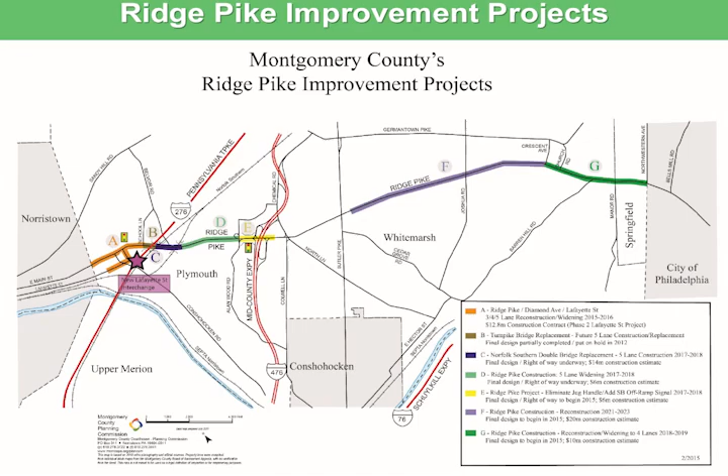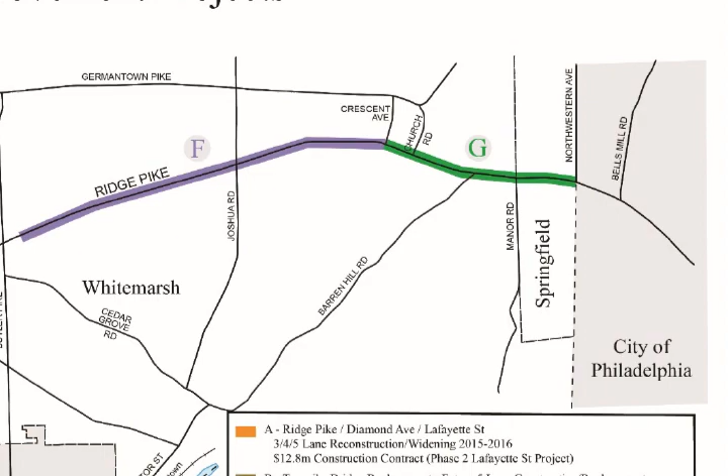Paul's with Gannett Fleming, our engineering project manager, and he'll go through and give everything. We own the entirety of Ridge Pike, and we have different projects in different places, but I'm not going to go into what all those other colors are. The only thing you need to focus on in this map is letter G. That's Crescent to Philadelphia. That's the subject of this effort right here, which uses 100% county funds.

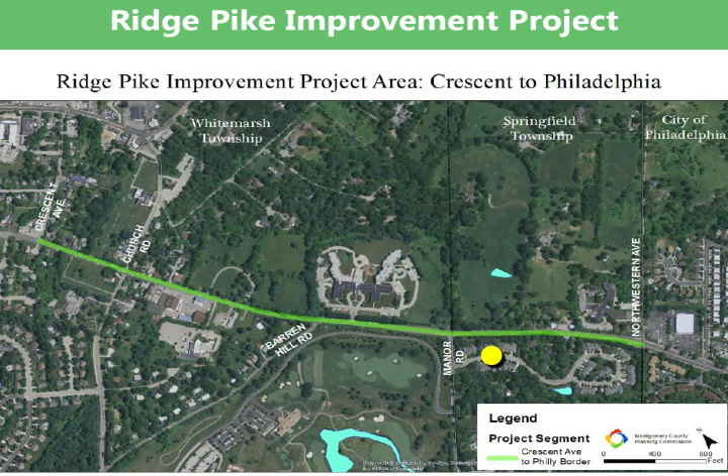Section G, as Matt said, is what you see in green. It's from Crescent Avenue to Northwestern. I'll give you some landmarks: here is St. Peter's Church, cemeteries on both sides, Hollids Hardware, its gift shop, Masonic Village, Barren Hill Road, Manor Road, the Eagle View Townhomes, and Northwestern Avenue, the city line.

So what are our project goals? First and foremost would be to reduce congestion. As you know, in front of Hollids, the 2 lanes eastbound converge or merge down into 1 lane all the way to the city line eastbound. Another important goal is safety improvements. Probably the most significant safety improvement would be to introduce signals where they're warranted. There are 2 traffic signals that are warranted that aren't there today: one's at Crescent Avenue and the other one is at Barren Hill Road.

Another project goal would be to reconstruct the pavement. As Matt had said, it's quite old and falling apart. It's been overlaid just about 5 years ago and is already starting to show signs of distress. Another important goal would be to accommodate pedestrians and provide for transit users, with sidewalks and bus stops. There's very little drainage, only 1 or 2 inlets on the entire stretch of Ridge Pike, and very little curbing, so rainwater just runs off right onto lawns and creates some erosion and flooding issues. And lastly, we would like to provide some aesthetic treatments to preserve the historic look and character of this area.

This is the first roll plot you may have seen when you walked in. It details some of the existing conditions, some of the problems with Ridge Pike. I'll take you through this in thirds because it's kind of hard to see.

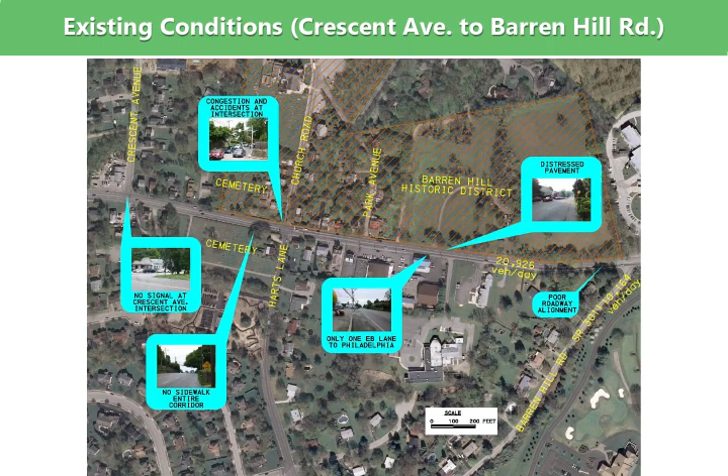The next third of the section would be at Barren Hill, between Barren Hill and Manor Road. We do have significant volumes of traffic. You may have noticed on the roll plot that there's about 31,000 vehicles average daily traffic between Barren Hill Road and the city line. To the west of Barren Hill Road, it's 21,000 vehicles, and Barren Hill itself actually has an average daily traffic of 10,000 vehicles. That's significant.

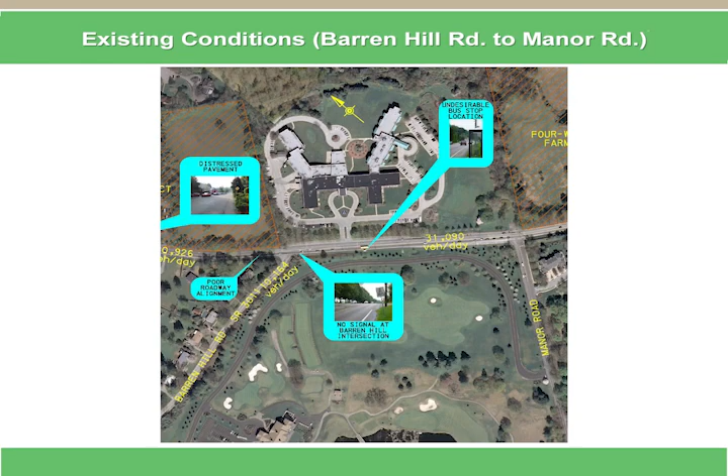Barren Hill Road does not have a traffic signal, and when we did our traffic counts, we easily found that it meets 1 or 2 warrants, so that qualifies to become a traffic signal.

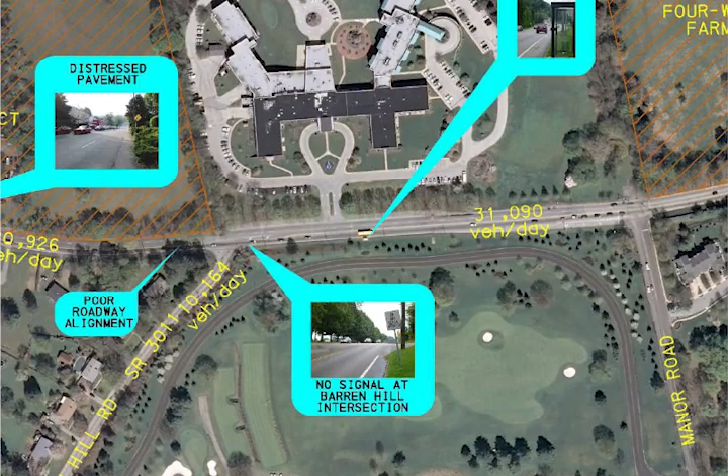There are issues with bus stops. There's a bus stop across the street from the old entrance to Masonic Village, and there's no way to get to that bus stop. There are no sidewalks. Some people actually cross 3 lanes of traffic to get to that bus stop, some of them elderly. We'd like to correct that condition.

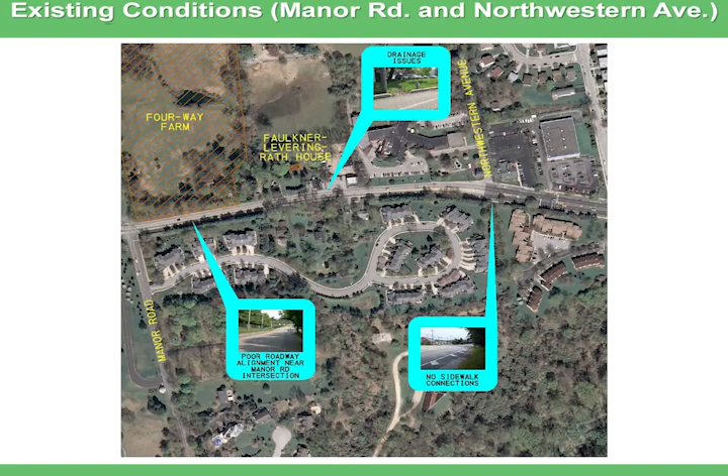East of Manor Road, another wiggle in the alignment when they introduced left turn lanes at Manor Road, and it happens again in a sag curve condition. Not as much of a problem as the crest curve or a hill, but still not a good alignment to have people move to the right, move to the left, and then right into a curve. We'd like to straighten that out as part of the reconstruction.

I mentioned drainage issues. This is one location where there's actually just a break in the curb and rainwater just rushes out of the curb and right onto a lawn and into a parking lot. And again, there are no sidewalks for the entire length of the corridor.

So I'm going to revisit the project goals and show you why they are our goals. Widening - why would we want widening? It's not so much widening, it's actually adding the missing lane east of Hollids.

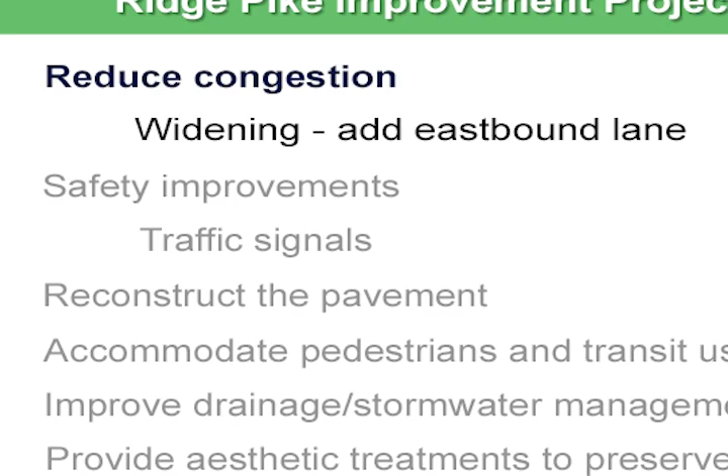Here's a typical situation on either a bad day or when there's traffic on Schuylkill, or just if it's rainy - it slows traffic down, but it typically backs up quite a ways west of Church Road. Here we are, even west of Crescent Avenue. That probably happens primarily because of the 2 lanes that merge to 1 out front of Hollids.

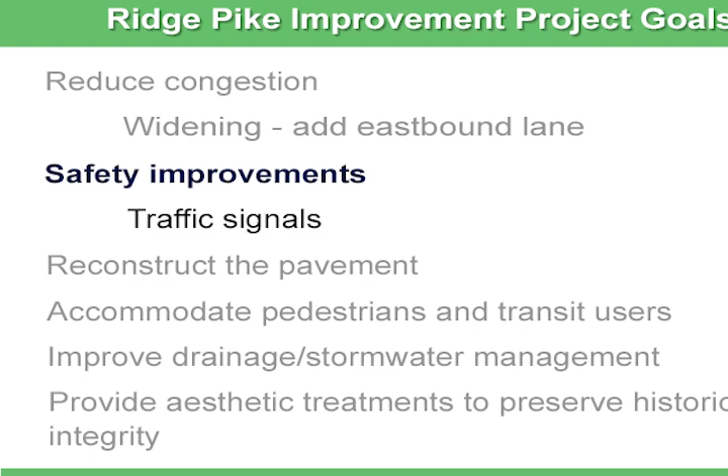Here's the traffic intersection at Barren Hill Road. Here's a truck trying to make a left-hand turn, just causing a backup on Barren Hill Road. And of course, we have plenty of signs that say don't block the intersection. Difficult to do in the afternoon when everybody is fighting for a position,

Or waiting for your courtesy gap to get into Ridge Pike. Another goal is to reconstruct the pavement. As we mentioned, it was first built in the 30s, overlaid in the 1970s, widened in the 1970s, and overlaid as recently as 2011. But it's already showing signs of distress in various locations, potholes. And you can see here this joint. This is in front of the State Farm insurance near Harts Lane.

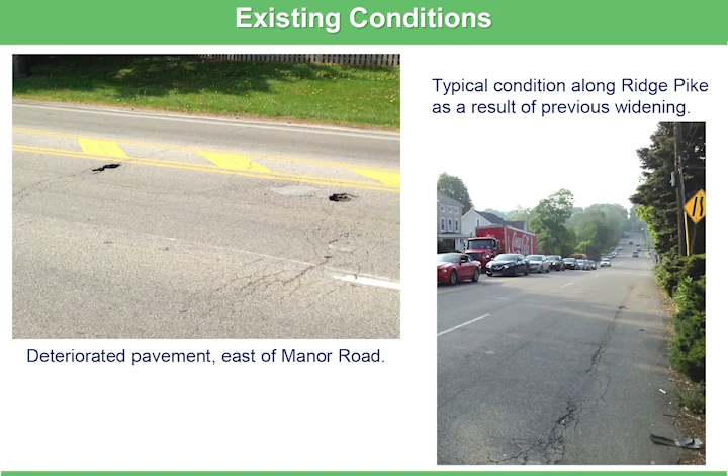I'm talking about where recently at the Manor Road intersection, a right turn lane was introduced for the new entrance into the Masonic Village. And you can, if you watch my mouse, I'll trace for you where the center dashed line used to be. Now it moves to the right. So you basically are shifting traffic to the right, and they have to straighten back, and then they go right into a curve to the right again.

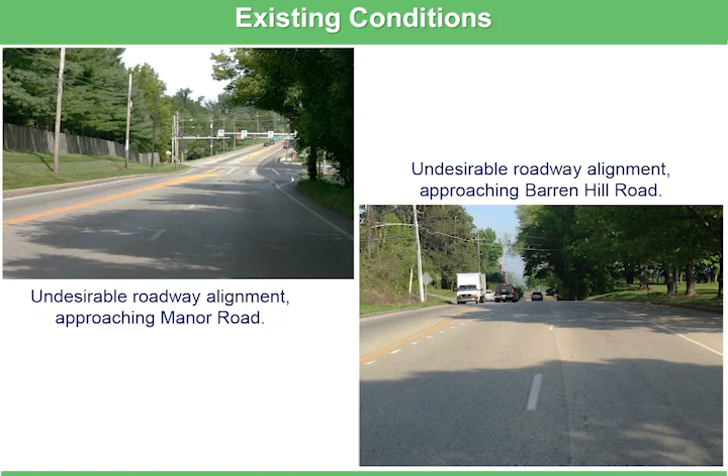You combine that with wet pavement, a little bit of snow, and you can't see the lines. People get lost, and you can have some accidents. So when we reconstruct, we'll straighten all this out and make it a smoother, straighter alignment. And then another one just like it is at Barren Hill Road, but that wiggle is in combination with going over a curve, where you can't see what's over the curve. Well, what's over the curve is another wiggle and another curve to the right.

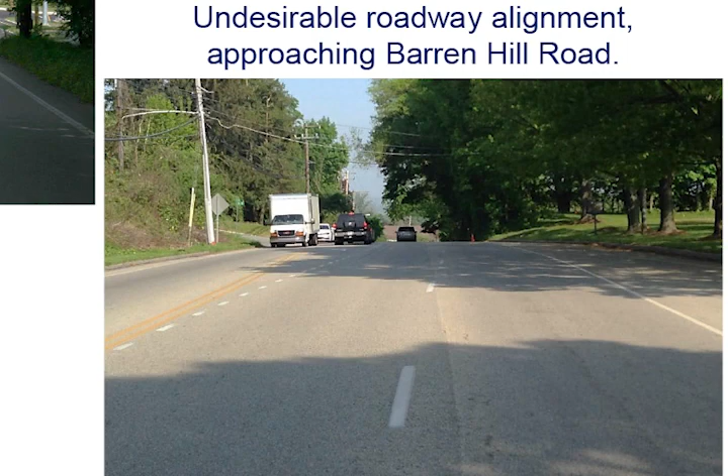Another goal, again, is to accommodate pedestrians and transit users. Here are some conditions where I mentioned the bus stop across from the Masonic Village and no sidewalk, no way to get to it safely. And here's other areas where there's a little shoulder on the road, but I don't think you want to walk in the road when they're

trying to kind of driving too fast. It's also very narrow, not much of a shoulder. You wouldn't want to walk in a shoulder. You want to walk on a sidewalk, but there's no sidewalks here. It's a steep slope, there's shrubbery, there's poles in the way. We want to correct that as well.

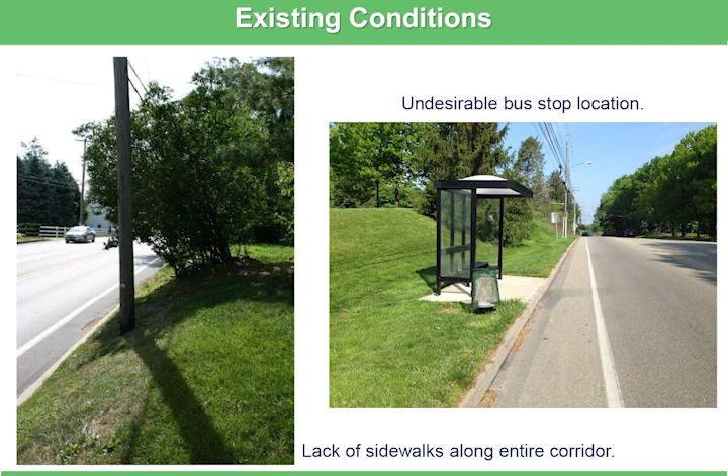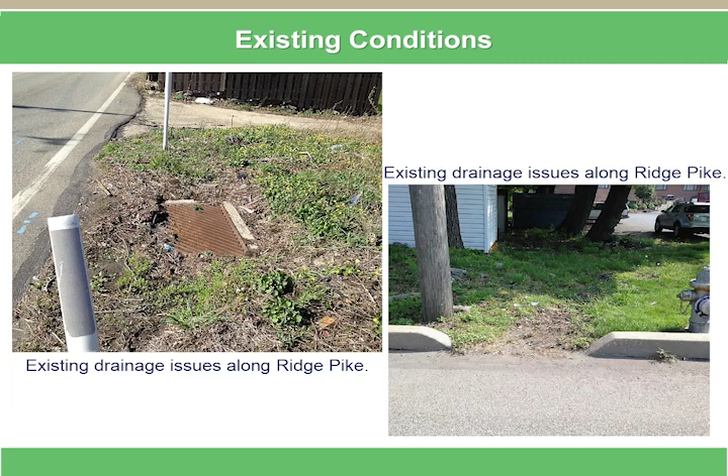Another goal is to improve stormwater management and drainage along the corridor. As I said, there's only a couple of inlets. And some of them don't even have any kind of curbing behind them to direct the water into the inlet, so the water just kind of runs around the inlet and runs across lawns or down other driveways. And on the right is another slide here where there's actually a break in the curb, and the water is allowed to just rush onto the lawn and onto a parking lot. We would correct that by adding new drainage systems, new pipes, new inlet boxes to collect the water and convey it to a proper stream or waterway or basin.

Because we need to now satisfy newer requirements that weren't in place when Ridge Pike was built for stormwater management, infiltration, things of that nature.

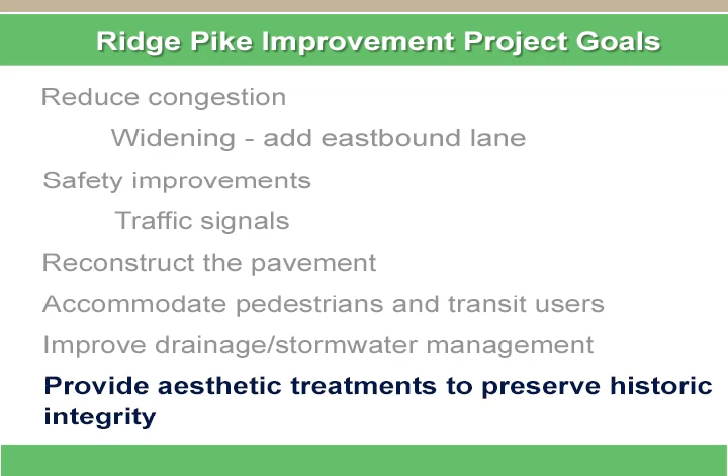Our goal is to also preserve the historic nature of Lafayette Hill, and we do that because there are 3 eligible resources within this corridor of Ridge Pike. The first is the Barren Hill Historic District. It kind of begins at the edge of the cemetery, St. Peter's Cemetery, and extends all the way to the edge of Masonic Village, but it's only on the north side of Ridge Pike. It does not cross over to the south side.

And that's important because in order to put a sidewalk through, we have to widen at least one side of Ridge Pike in the area where there's retaining walls or masonry walls for the cemetery on both sides of Ridge Pike. Since the historic district does not extend on the south side, it's possible for us to relocate the wall that's on the south side of Ridge Pike and put a sidewalk through that area.

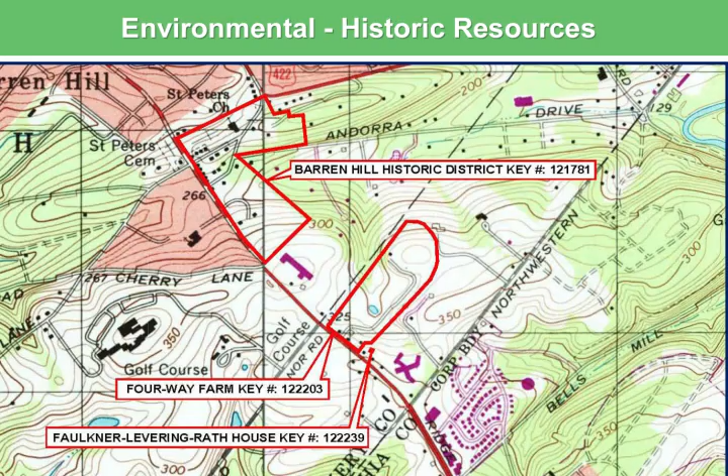Another eligible historic resource is the 4-way farm, which could be developed shortly. Atria and TC Properties are in the process of land development. And then the last historic resource is the Faulkner-Levering Rath House, which is set back a ways from Ridge Pike and will not be impacted by this project.

Between Crescent Avenue and Barren Hill Road, we propose a continuous sidewalk to connect to the sidewalk that's near Pine Ridge Road, and that would run all the way east to the city line at Northwestern Avenue.

The addition of a traffic signal at Crescent Avenue. Improvements to the existing traffic signal at Church and Harts Lane. Those improvements could be timings, improved signing, because it's hard to read the street name signs, and pulling stop bars back to allow right turns to have a little bit easier time getting into those side streets.

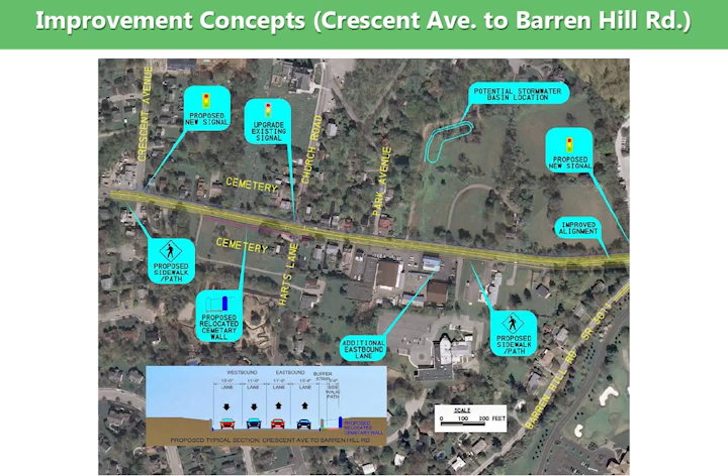Of course, then the addition of the eastbound lane, so you have two lanes all the way to Philadelphia. The improvements of the alignment, as I mentioned, straighten out the little wiggle in the alignment. And stormwater management, possibly a basin at the rear of property owned by the Smith family.

This is what the cross-section would look like between Crescent and Barren Hill. Two lanes each way. The inside lanes would be 11 feet. The outside lanes, 13 feet, because they're up against the curb. It's good practice to have a couple of extra feet since you're up against an obstruction, a vertical curb.

And here's the existing wall that would be relocated back approximately 8 to 10 feet to fit in a sidewalk divided by a 3-foot grass buffer strip. And in that buffer strip is where you could typically relocate your utility poles and street signing.

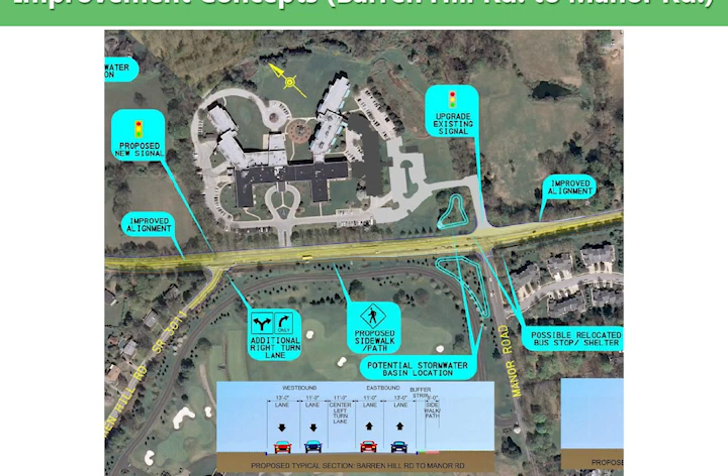And that's quite a volume of traffic that turns right to go east, or the return movement to turn left to go on the Barren Hill. And to not have a big impact on the operation of that traffic signal, we're proposing to have 2 right turn lanes on Barren Hill to go east onto Ridge Pike. That will give you the maximum amount of green time you can keep onto Ridge Pike.

And then again, the continuous sidewalk, as I mentioned. We talked about bus stops. We would recommend bus stops at Manor Road rather than where they're located now, which is across the entrance from Masonic Village. Stormwater management improvements, there's a possibility of maybe enlarging the existing basin here at Masonic's entrance.

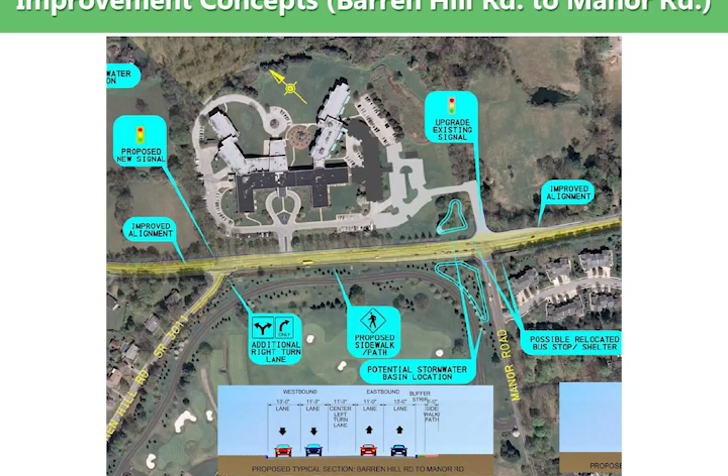And possibly between the entrance road of the golf course and the intersection of Manor and Ridge Pike, a basin could be put in there.

The existing signal at Manor Road, it's operating as it was designed, but if we add additional signals along the corridor, it could be retimed and interconnected with all of the signals, so they sort of talk to each other. They could even be what they call adaptive signals. It's a new technology. It uses cameras that actually view traffic and change its timings depending on demand, keep traffic flowing.

And can regulate speeds in a sense that there would be no advantage to you to hurry up to the next traffic signal because there might be another platoon of cars that's already queued up.

I don't want to get into too many details, but it's a new technology. If you've been in King of Prussia, between the mall and Bridgeport, there's a 2 or 3 mile stretch of traffic signals that all have this new technology, adaptive signals. And it works certain times of the day when you used to be at almost every traffic light, hitting a red light, you now run smoothly all through all of them.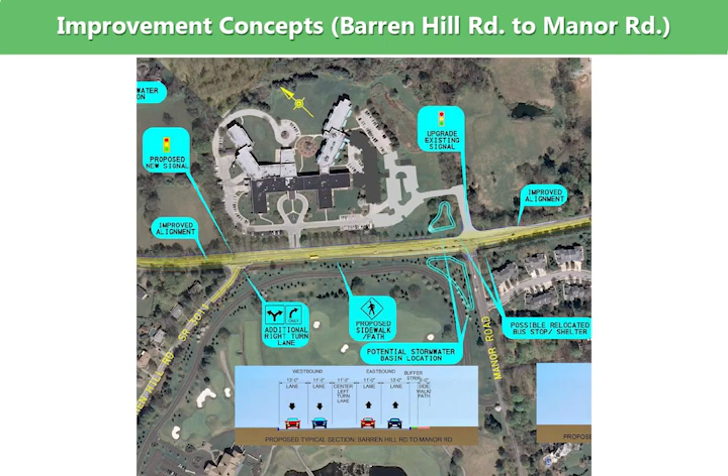This is the typical section for that stretch. Let me back up for a second. As I mentioned, these two signals now have a left turn lane, but they're so closely spaced we're just going to maintain that 11-foot lane in the middle that becomes those two left turn lanes. So here's the typical section for this stretch of the highway: 11-foot through lanes, inside lanes, 13-foot outside lanes, as we showed on the previous cross-section near the walls, but here's that center area which acts as the left turn lanes at the two traffic signals, and then the buffer and the sidewalk.

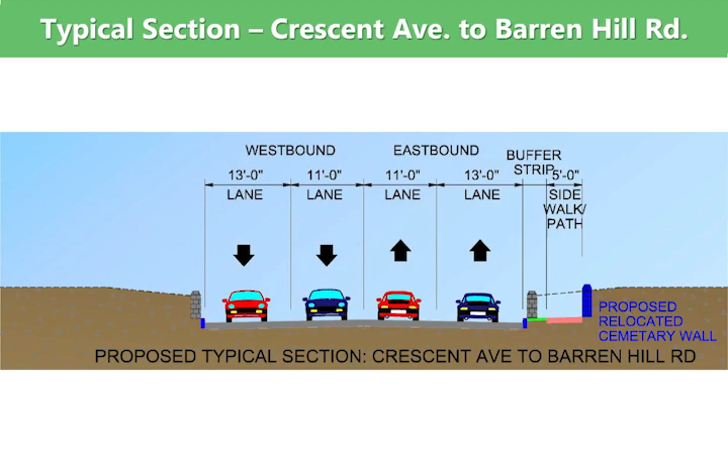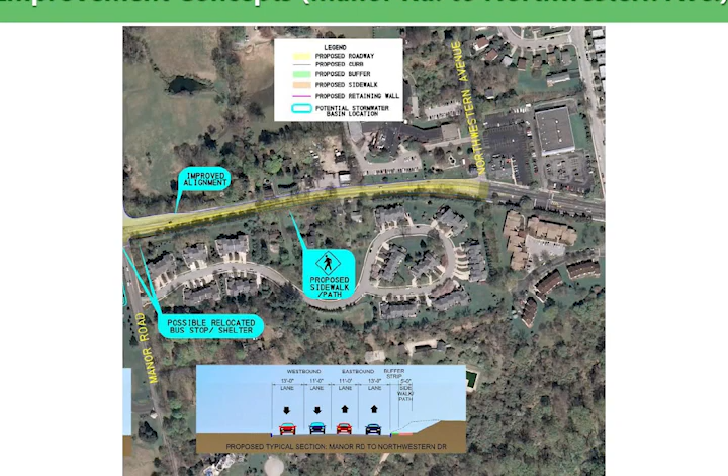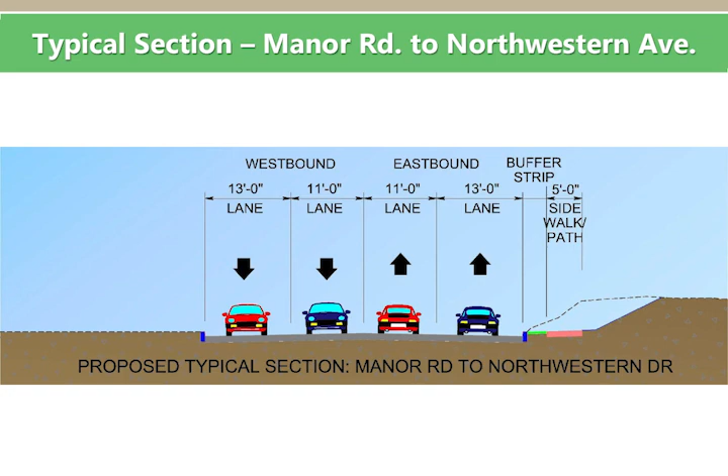The last section is from Manor to Northwestern Avenue. There's that wiggle in the alignment I mentioned that will straighten out as part of reconstruction. We'll continue the sidewalk to the city line, and we had a drainage issue up here that we'll rectify by closing the curb and putting in more inlets. This is the typical section in this area: 11-foot inside lanes, 13-foot outside lanes, buffer and sidewalk. This would require some cutting into the adjacent properties in order to fit this in, because in this area the ground is kind of elevated on the south side.

We did have one board at the back.

If all goes well, we'll move into final design, which could take another 18 months. Then we have the bidding process and finding a contractor. Construction could begin as early as 2019 and possibly take two years to construct. We would construct it while always maintaining traffic on Ridge Pike, and always maintaining access to buildings, properties, owners, businesses, and homes. But that makes the intersections a little tricky. There may be instances where you need a short-term detour at one of the intersections in order to actually build it. That's our presentation.